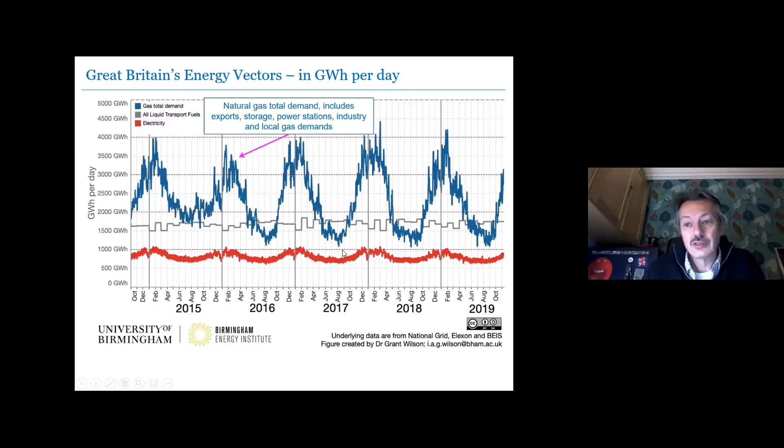And so London is regularly, as are other cities in the UK, in breach of air quality regulations in terms of NOx emissions in particular. And if we had electric transport, whether that's a battery electric or a fuel cell electric vehicle, our NOx emissions come down markedly, and we mitigate some of these air quality concerns and their associated impacts on human health.

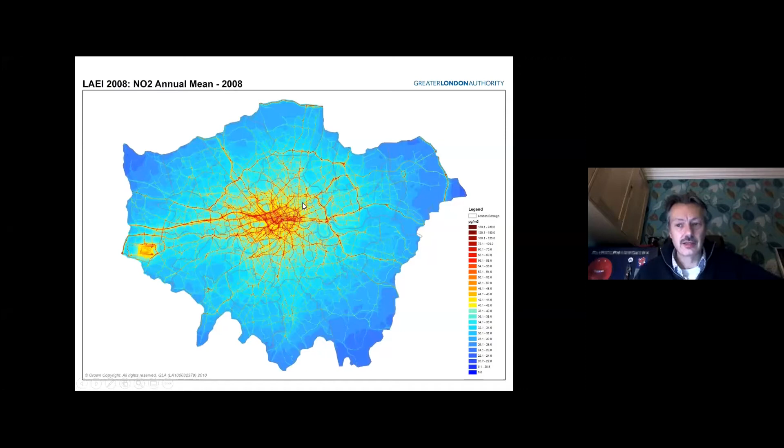But why is hydrogen interesting? Well, once we've made that hydrogen molecule, it doesn't carry a carbon molecule with it. If we convert that hydrogen, whether that's with a fuel cell or whether that's in a combustion engine like a gas turbine, the product of that reaction is going to be water, and that of course is not going to have any associated contamination or health implications.

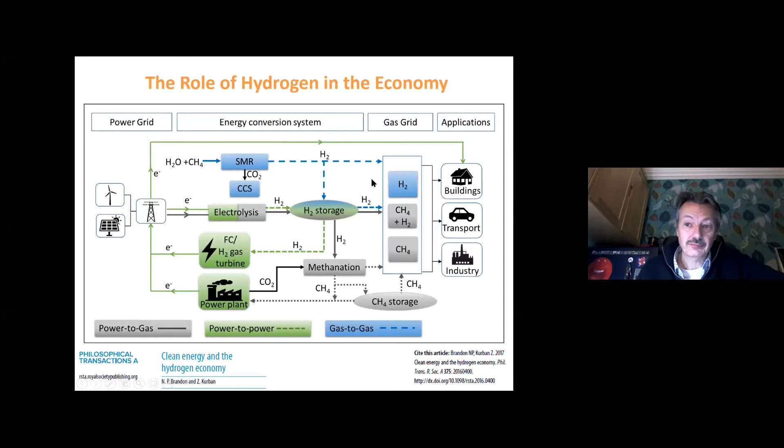So as I said, you've got what people talk about, these three different colors of hydrogen. Gray hydrogen, that's hydrogen made from fossil fuels. 96% of the hydrogen we make today is like this. It's unabated fossil, and we make it for the chemical sector, for fuel upgrading and dehydrogenation reactions, hydrogenation reactions and so on. Blue hydrogen is hydrogen made from fossil fuels with CCS, and green is hydrogen made from renewables.

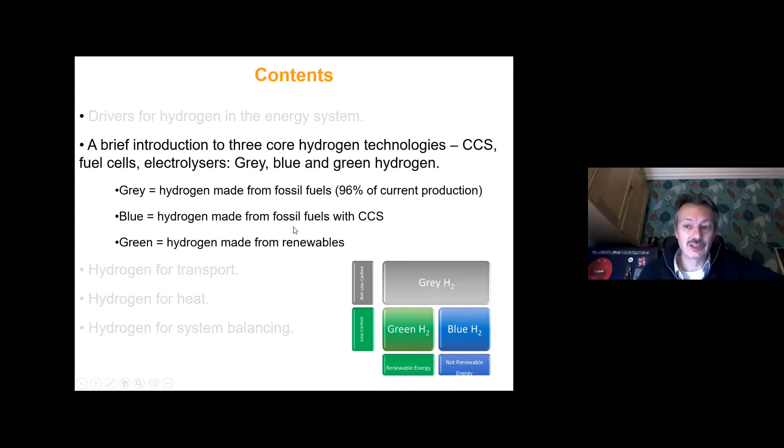And in a CCS technology, we're taking something like coal, or we're taking natural gas. We're going through various industrial scale thermochemical processes, adding in steam and producing a mix of hydrogen and CO2. We're capturing that CO2, and then the hydrogen is going forward. So this is never 100% effective. You can capture perhaps 96% of the CO2 if you do it with modern technology. But nonetheless, therefore, it's a low carbon but not zero carbon hydrogen that results.

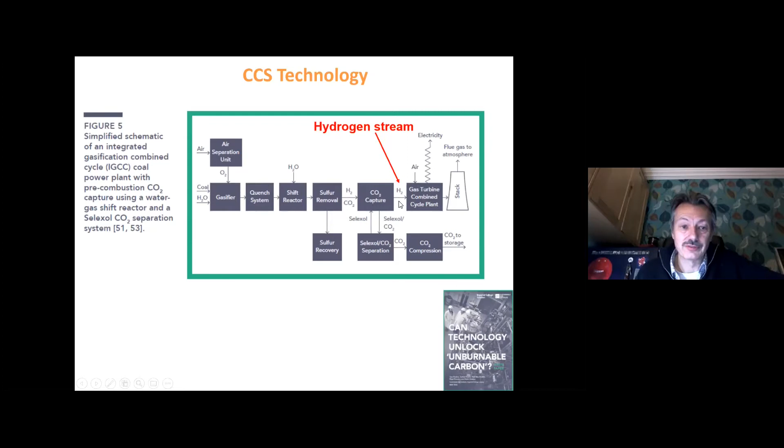Happy to take questions on electrolyzers if people are curious about the details, but broadly speaking today, there are two commercial electrolyzer technologies available. That's alkaline electrolyzers, a mature technology set that we've been using for things like chloralkali cells and water splitting for over 100 years. You can go and buy a 100 megawatt electrolyzer if you want from people like ThyssenKrupp. So it's a mature technology set

and has some advantages and some disadvantages. It's the lowest cost route to green hydrogen today, but it's quite a large plant. It's quite big. It doesn't produce hydrogen at particularly high pressure, which some applications need, and it's not particularly flexible in its load following characteristics, more of a base load type technology today.

PEM electrolyzers are a relatively new game in town, but are increasingly being commercialized. We have a very good company in this space in the UK called ITM Power, based up in Sheffield. They use a polymer membrane inside the electrolyzer. They need precious metal catalysts, however, like platinum and iridium, but they are more flexible. They produce hydrogen at pressure. And if you go and drive your fuel cell car onto the Shell forecourt on the M40 at Beaconsfield or on the M25 at Cobham, it will be an ITM polymer electrolyzer that would produce the hydrogen that would refuel your vehicle.

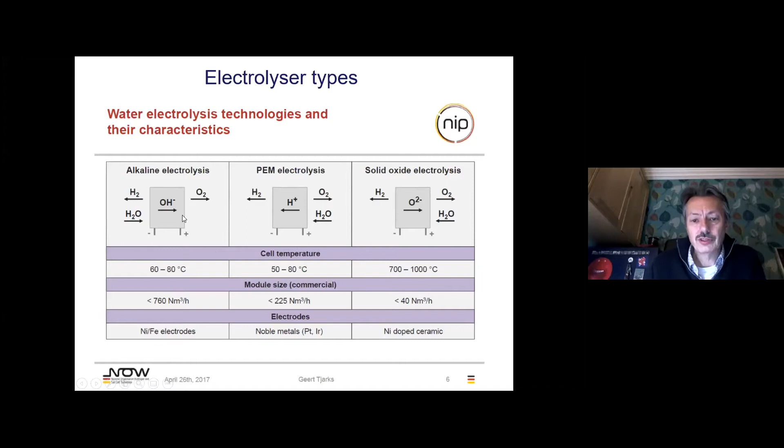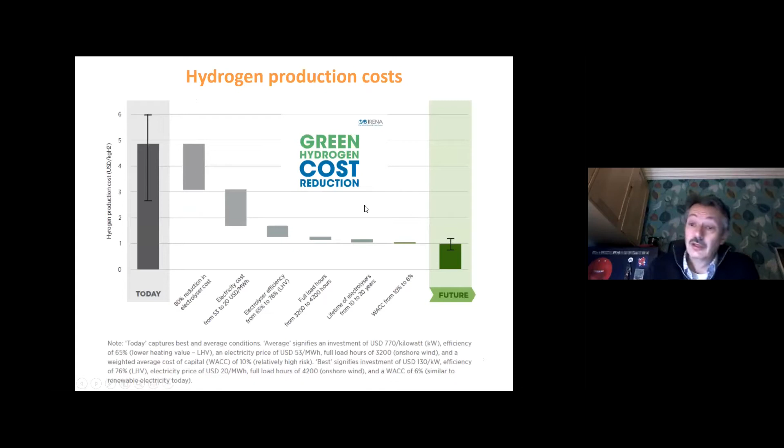And those cost downs are sensitive to, again, the price of the electricity that's being fed in and the efficiency of the electrolyzer. So we'll perhaps talk about that in Q&A if people would like to, but there are prospects, and lots of commentators feel that by 2030, green hydrogen will be the cheapest form of low carbon hydrogen, cheaper than blue, with the prospects for further cost down going forward.

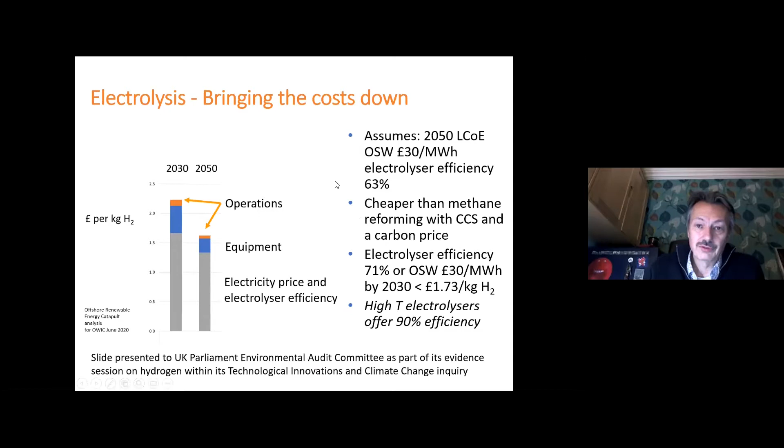And the other technology I want to talk about is one I've worked on for a long time, which is fuel cell technology. So if we've got hydrogen, the most efficient way of turning it back into electricity, if that's what we want to produce with it, is in a fuel cell. Well, there are a number of types of fuel cells, but there are two leading candidates in terms of the current fuel cell sales worldwide.

A technology that has been around for a long time, the fuel cell, but it's taken a significant time for it to become a commercial proposition. But in 2019, over 1 gigawatt of fuel cell products were shipped worldwide. So it's starting to move into more serious territory. There are two main classes here that I want to talk about: the polymer fuel cell, the proton exchange membrane fuel cell. All fuel cells run on a similar principle. They have an ionic conductor, which separates two electrodes where the electrochemical reactions happen.

In a PEM fuel cell, we put hydrogen on one side. That hydrogen is oxidized, releasing electrons, forming protons. Those protons cross the membrane, which is permeable only to protons. They combine with oxygen at the air electrode, plus the electrons that are transported around an external circuit, and produce water. That flow of electrons is electricity, and the fuel cell would generate about 1 volt if no current is being drawn, and about 0.7 volts per cell when you are drawing current. So that's how the fuel cell works.

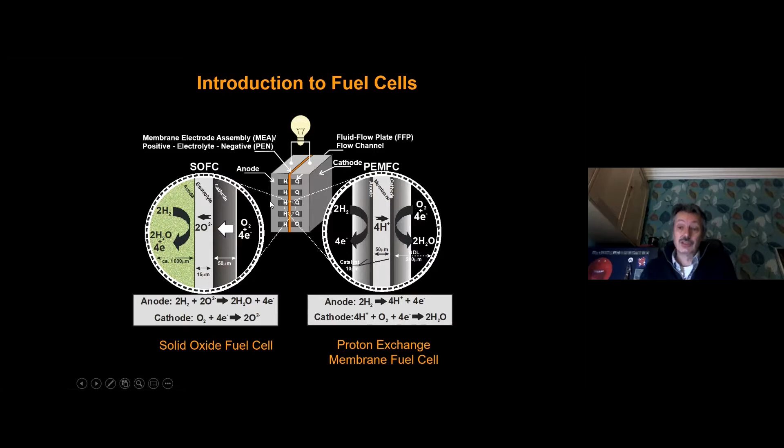The electrolyte now conducts ions of oxygen, but again, we put hydrogen or a hydrogen-rich gas on the fuel side. Again, the fuel is oxidized, releasing electrons by accepting the oxide ions to form water, and now steam at these temperatures. And on the air side, the oxygen is reduced. And again, we get the flow of electricity, which is flow of electrons. Okay, so that's the brief introduction to the key technologies.

Let's talk a bit about the applications. And hydrogen for a long time has really been associated with transport. And if we look back at the last wave of enthusiasm for hydrogen, which was in the 90s and the noughties, it was really motivated by hydrogen fuel cell cars. So light duty vehicles. And here we, of course, have our hydrogen fuel cell Mirai. There's a new Mirai just coming out.

A limited number of these have been manufactured. About 11,000 have been purchased, and 180 have been purchased in the UK, which is as many as Toyota made available to the UK. And it's a very nice electric car to drive, right?

So this car, the cartoon on the side is actually a map of where the components are, the hydrogen tanks inside the vehicle under the floor, the fuel cell, which produces just over 100 kilowatts. So it's an electric car that will do 340 miles. You can refuel it in a few minutes, and it's a very effective, a nice car to drive.

Hyundai have just brought out a new fuel cell electric vehicle, the Nexo, that costs you £70,000 to buy. So these are currently still not cheap motor cars. But the new Mirai will be coming later this year. That will do you 400 miles and cost about £50,000. So still quite a lot for a Toyota, but much less than they were not that many years ago.

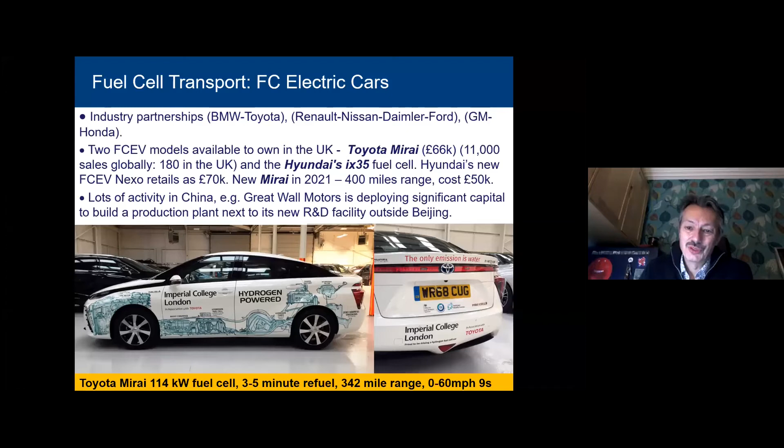So a lot of interest still in fuel cell electric cars, but we might want to talk about it in the discussion. But I have to say, as the vehicle size gets smaller, battery electric really starts to look more attractive perhaps than hydrogen fuel cell electric. But as the vehicle size gets bigger, the converse is the case.

And here we see, I think, one of the really interesting areas for fuel cell vehicles, which is the bus market. We have a number of these buses in London. We've had them for a while now, which run on this route through Covent Garden. They're refueled actually at a refueling point out near the Olympic Park in East London. Aberdeen has these buses. I believe they're coming into Birmingham as well. So effectively zero pollution public transport, which is what these bus fleets offer.

And you'll see there quite ambitious programs about hydrogen fuel cell bus rollout, particularly in Asia. And here we can see Shanghai. We've just heard a little bit about Shanghai from our previous speaker, but China has very ambitious plans around these sorts of transport technologies, but also in South Korea and in the US and in parts of Europe and even here in the UK. I do think this is a really interesting market for hydrogen fuel cells.

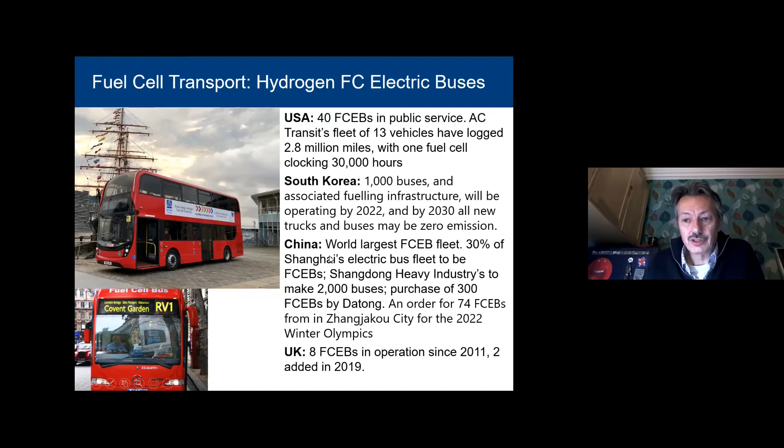The other really interesting one, I think, is when we come into other heavy-duty vehicles like trucks. As soon as the energy requirement for the vehicle starts to increase, it gets much harder to deliver that with batteries. And using a fuel cell and a hydrogen tank starts to become more attractive.

And as we've made our national and international commitments to net zero, how we decarbonize long distance transport and heavy duty transport is really putting hydrogen fuel cells back onto the map of both the vehicle OEMs and companies involved in the truck sector like Toyota and others. So we have a number of, if you like, smaller duty vehicles and heavier duty, larger vehicles, increasingly of interest now, which are hydrogen fuel cell powered.

And then finally, I think one perhaps those of us working in the sector hadn't seen a few years ago, which is hydrogen fuel cell electric trains. There is now the world's first fuel cell passenger train operating in Germany. You might have seen there was a piece on the BBC actually about the University of Birmingham and others doing the first tests on the UK's first hydrogen fuel cell electric train.

So this is about electrification of train lines to replace diesel electric on lines that don't carry sufficient passenger numbers to warrant the cost of full electrification, but where we still want to move away from diesel. And this is proving a very interesting opportunity for the right sort of application areas such as that. And again, in terms of the refueling issue, it's nice and straightforward. You know where the train goes from and to, and you can manage that refueling infrastructure.

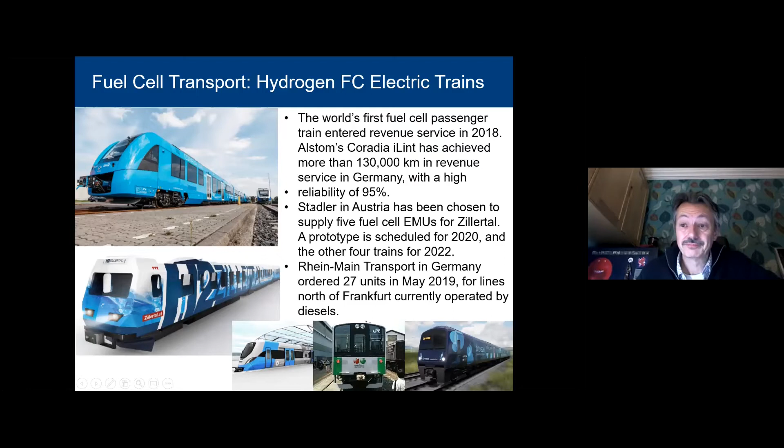Okay, so I want to move on then to some of the other application areas and talk a little bit about hydrogen for heat and power. As we saw in the figure earlier, heat is a really difficult topic when we come to decarbonisation. These seasonal variations between winter and summer, our very strong reliance on natural gas, which is inconsistent with our decarbonisation objectives, means that we need to find an alternative. Heat pumps and electric solutions are in fact ideal for new build, but are quite difficult as a retrofit into our largely old and quite leaky housing stock.

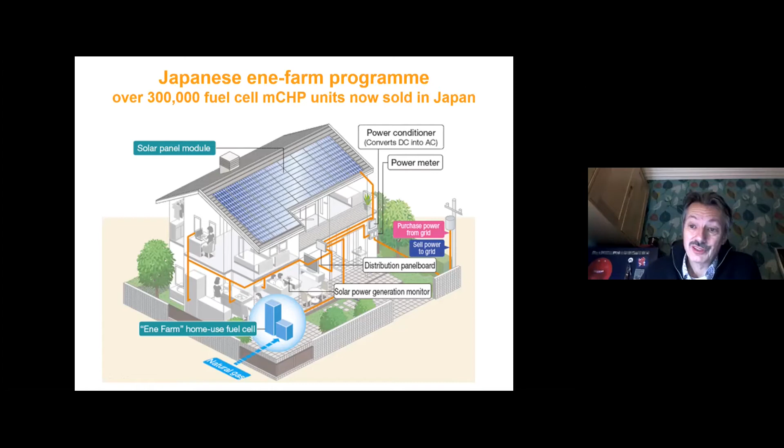And 300,000 of these so-called fuel cell micro combined heat and power units, so that's a fuel cell that generates both electricity for the home, but also captures that heat locally and uses it within the home to give you a much more efficient boiler, essentially, have now been purchased by consumers in Japan, for example.

Now, I want to here dwell unashamedly on some of my own work in this area. So some years ago, over 20 years ago now, we set a company up based out of our research at Imperial College. This company was called Ceres Power. It now goes by often the name of Ceres. It's simplified its name. And it's a fuel cell company that's based in the UK. It's based in Horsham, which is to the south of London, and is producing a fuel cell technology, which is targeted in part at this application, but also in a range of other applications.

These slides are taken from the annual general meeting that was held in December. So I've lifted the slides and they're all publicly available on the company's website. And it tells you a little bit about it. Interestingly, for those who follow these things, the market cap for this company in December was 1.8 billion. The market cap today is 2.5 billion. So it's fair to say it's a fast moving sector.

It's also disappointing I don't have more shares.

So just to give you a sense then of the movement in the fuel cell sector, which is proving a very dynamic sector in general alongside the hydrogen sector. And this is Ceres slides. So the key thing is this fuel cell, which is a very innovative approach that we invented at the university all those years ago, but the company has now really taken forward the processing and the manufacturing of this, of which there's a huge amount of know-how and IP to actually produce this in volume.

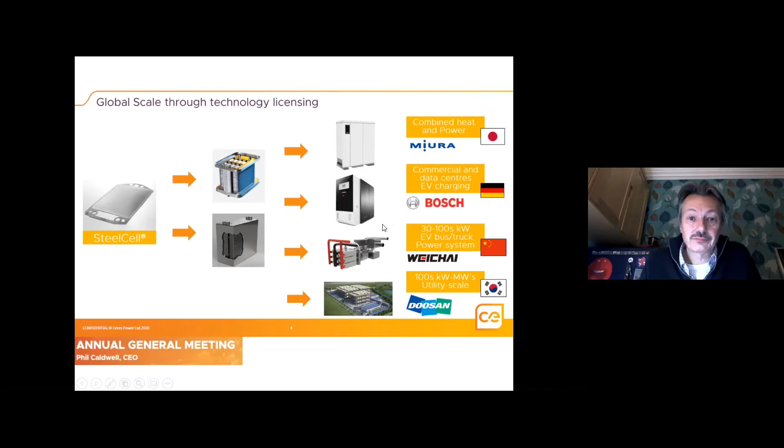And there's just been a new partnership announced with Doosan in Korea, taking this up to the hundreds of kilowatt to megawatt scale for power generation. So this is a British company pioneering a fuel cell technology, but with significant international uplift, significant international attention. And these again are from the company. It just shows you, this is the photograph of the CHP unit in Japan, for example, and some of the pictures of some of the technologies that are being developed.

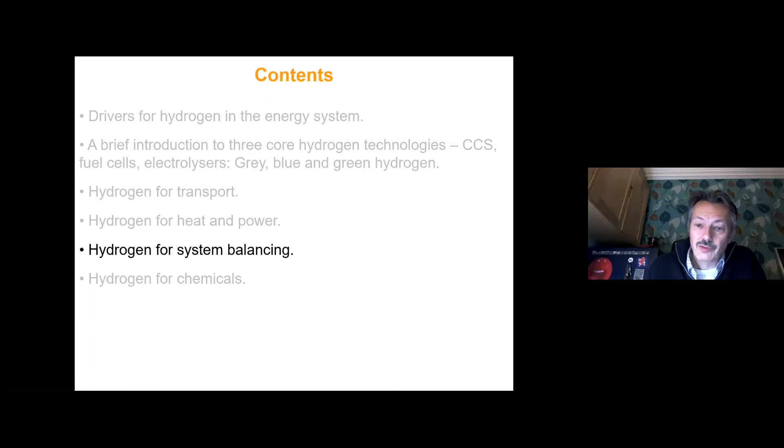So I want to then move on to the system balancing point. I'm conscious of my time, and take a slide that one of my colleagues has kindly produced, Professor Goran Strbac. Goran is a power systems engineer, and he's interested in the economics of power systems from an engineering as well as policy and business perspective. And this is a graph he shows, which looks at, for example, the value of flexible technology and the need for system balancing.

So this is looking at the UK energy system, and he and his colleagues have modeled increasing penetration of wind generation onto the UK electricity system up to 30 gigawatts, which is easily within the range of numbers that are being projected for offshore wind. And the percentage of wind that would be curtailed if nothing else was done to manage and to balance the supply and energy demand. So significant curtailment of some of that installed asset.

Another way of looking at it is the utilization of the infrastructure that's had to be built. If we simply go with a solution in which we balance supply and demand in an unintelligent way, simply by increasing the amount of infrastructure, the amount of wires we have to carry the increasing peak loads, without trying to time shift or in other ways manage the peak in demand with, for example, the peaks in generation or the lows in generation, this gives us an expensive infrastructure, which we also utilize less, and therefore is quite an expensive proposition.

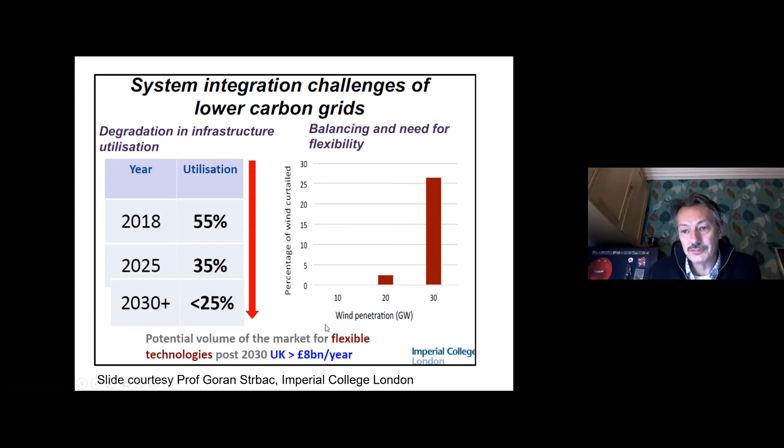So his work shows that there is a value of well over £8 billion a year to the UK economy for flexible technologies like energy storage. And that can be addressed in a variety of ways, and batteries, of course, are part of that. But so is hydrogen, or at least so is potentially hydrogen. And this is some of his analysis for hydrogen reserve needed to deal with the low wind period.

So some of you might know that in the winter months, we often get a period in which the wind does not blow for several weeks in Northern Europe. And this looks at the number of weeks with low wind and the sort of reserve you would need to be able to address that shortfall in generation without relying on fossil fuel reserves to do so. And you can see that it comes up into very large numbers.

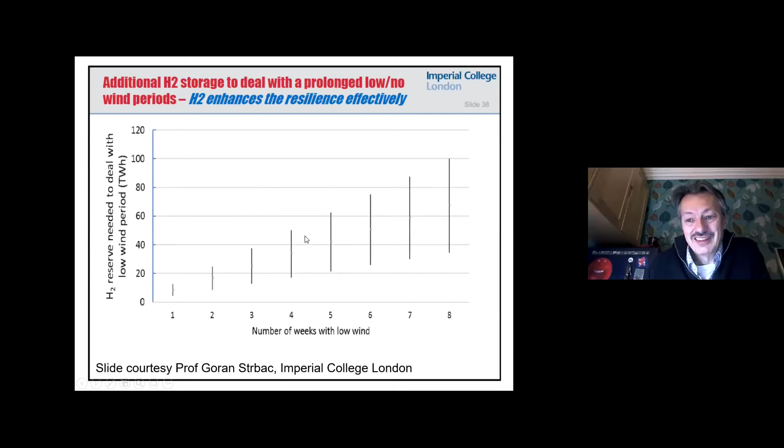These are in terawatt hours, and a 4-week period with low wind in February, for example, would need something like 20 to 40 terawatt hours of energy storage. That's almost inconceivably large for battery-based storage. But you can start to think about underground storage of molecules like hydrogen and putting that into something like solution mined salt caverns.

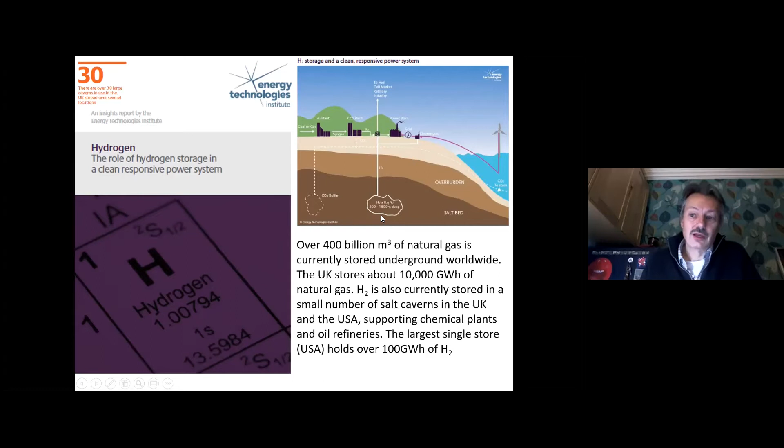That might sound a bit far-fetched, but we already do it. We do it for natural gas extensively. We store about 10 terawatt hours of natural gas in the UK, and we also store hydrogen, mainly for load balancing on chemical plants. And the largest single store in the US holds 100 gigawatt hours of hydrogen, for example. So these are of interest for these more strategic reserves to balance supply and demand.

Conventionally, these use 2 tanks of a liquid, normally a vanadium redox couple, in which you produce an oxidant and a reductant and store those. That has the advantage that when you want to store more energy, you just need a bigger tank. So scaling this to quite large, for example, to 12 hours of energy storage, becomes a much more cost-effective proposition than with a conventional battery.

And what we have done is invented some new chemistry, which is much cheaper than vanadium. It uses manganese as the liquid redox couple, and it uses hydrogen, actually in a closed loop, in a fairly low pressure tank as the other redox couple. And we believe this gives us a number of cost advantages and integrates nicely as well with the hydrogen economy.

This got to the Shell New Energy Challenge final, which was held just before Christmas, and came second, sadly not first. But we're still hoping to take this forward. And we have a startup now based in their own premises in West London.